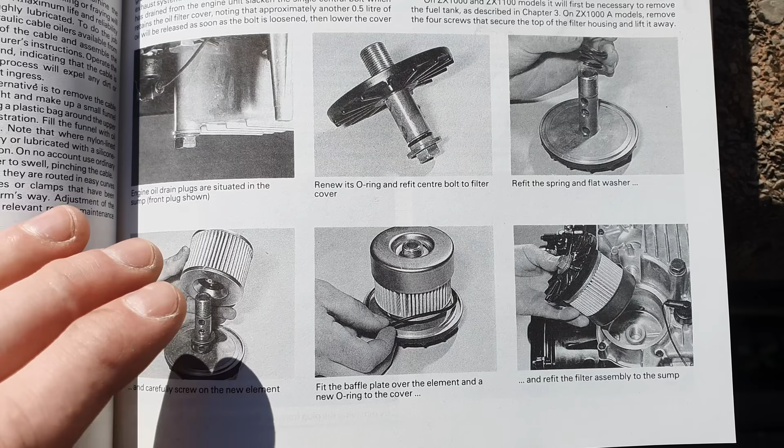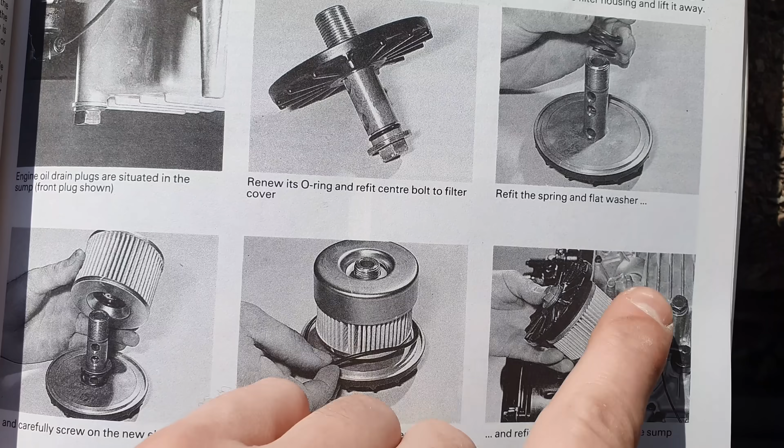So I got a comment this week saying that I'd done this wrong, and I thought I had, but no, I haven't. The spring goes on with the washer, and then the filter, and then the metal cap thing. The metal cap thing doesn't go on first, and then you put it in. Well, okay, in this picture, the engine is upside down, but it goes in like that. So I did it right. Okay, cool.

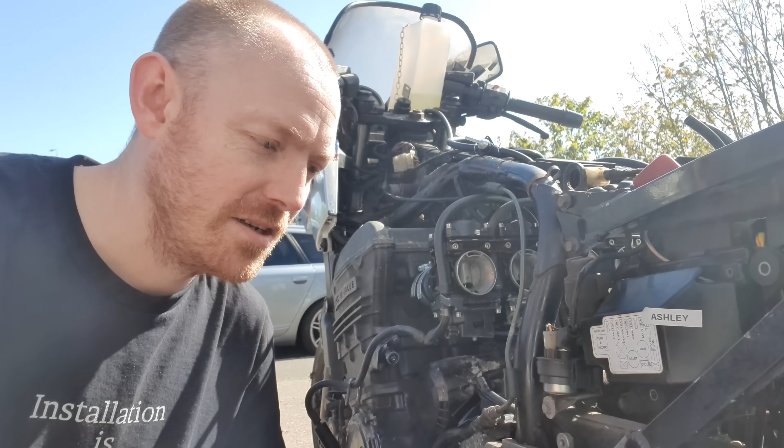Hi. Before I do anything else, I want to check the gearbox over, because we didn't do that in the last video. So I want to make sure that we've got gears and it's not completely fudged. So that's the plan. I'm just going to start the engine up and then try and whack it into gear, because I haven't got any clutch fluid in there and I haven't done anything with the clutch. But I can just bang it into gear and it should free it up, as long as the wheel is off the ground, right? Second thoughts, before we do anything, I need to sort this cam tensioner out.

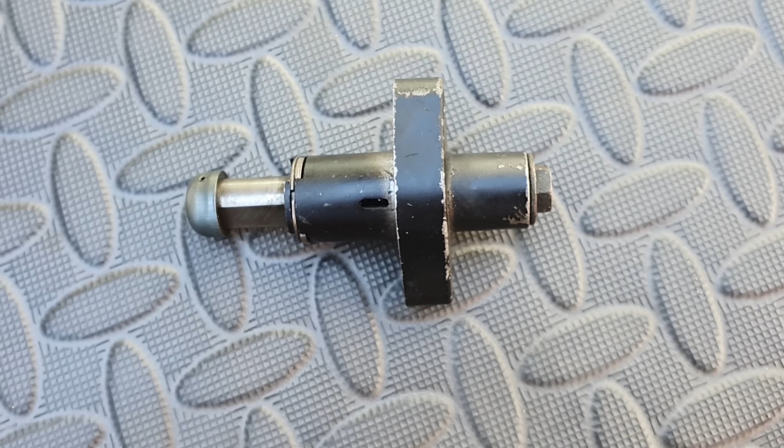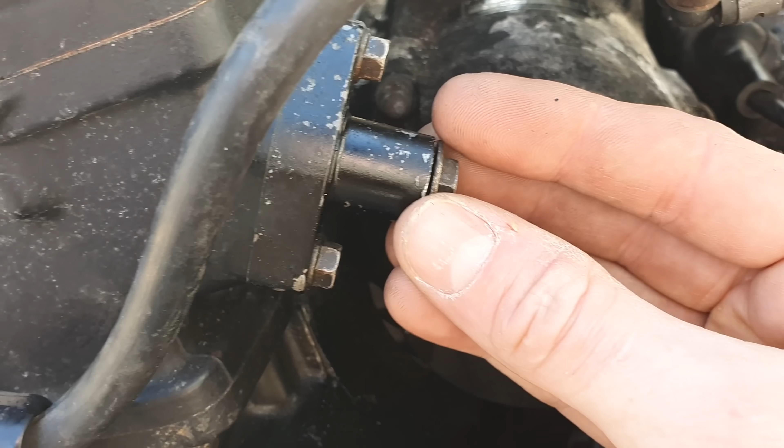Now, thank you everyone for your comments and telling me what it is. It actually tensions the cam chain inside the engine, so it's really super important. I've actually bought a replacement and I'm going to fit that now. This is the replacement, and this is the bit that's missing from mine, right? So I was just going to pop this on the one on the bike, but if you look at this, if I try and do that, it just turns infinitely. So I'd suggest someone has done that up way too tight and it's ripped the thread out of the inside of the tensioner. Brilliant, well done, whoever that was.

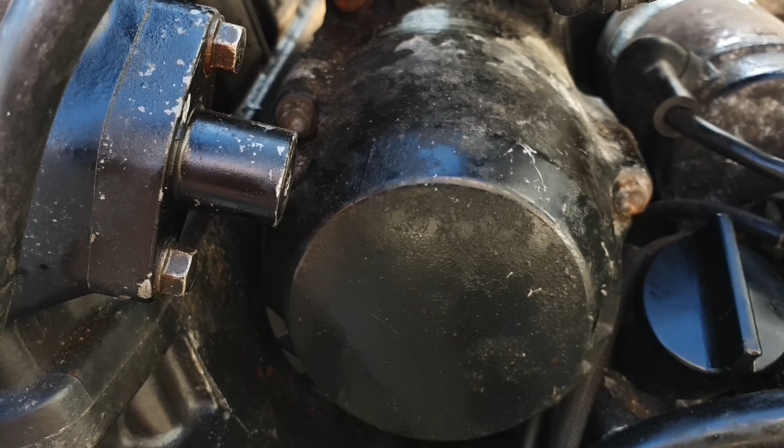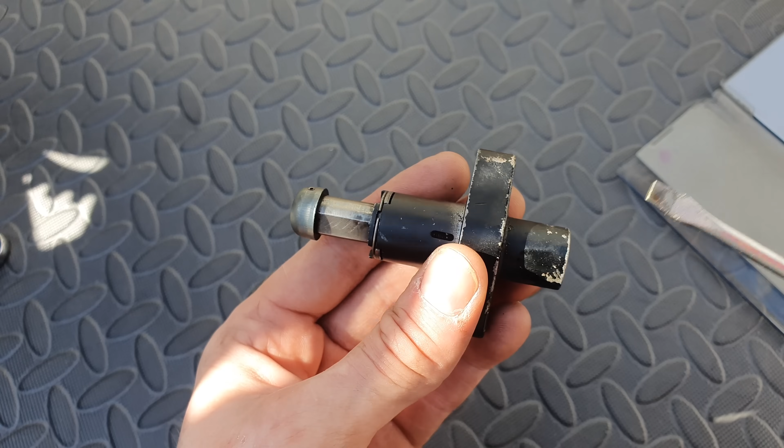So with that bolt removed, I'm just going to show you how this works. In the previous video, you saw me stick a screwdriver in here, right? Now if I turn the screwdriver, it actually pulls in the tensioner bit itself. And then I let the screwdriver go and it springs back out. So I'd imagine if I undo the two bolts that hold this in, when I fit the new one, I might have to wind that in, put it on the bike, and then release so it automatically springs out and pushes the cam chain to the right tension, assuming.

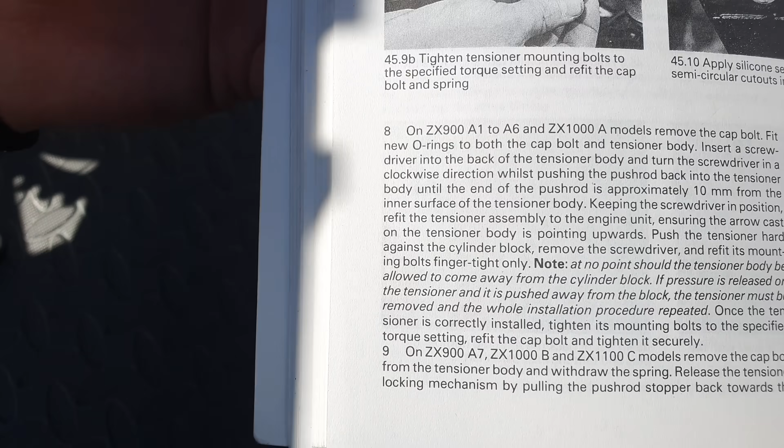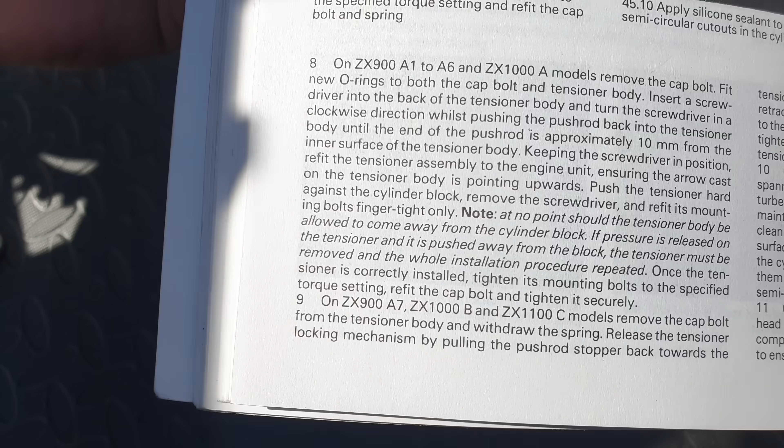Because assumptions are the mother of all mess ups, I've just found the instructions in the old trusty Haynes manual. I don't know if you can see that, the sunlight's a bit bright this morning. And it basically says exactly what I just said. Screw the screwdriver in until the tensioner retracts into the body, and then fit to the bike whilst holding the screwdriver in there. It sounds a bit awkward and fiddly, but that's the right way to do it, because then it will spring out to the right tension on the chain. Wicked. So let's undo these two bolts.

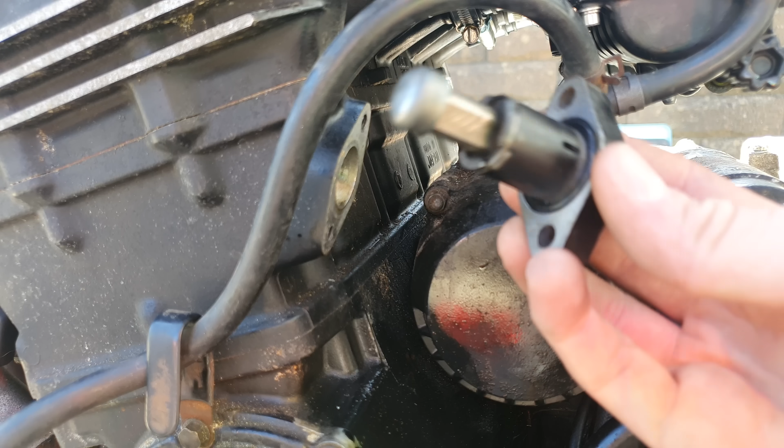I'm going to get a socket. I'm actually having to hold my left hand up at the top, because there's sun glare. The struggle is real. Oh, not 10mm apparently. 8mm? Right, try an 8mm. There we go. Uno. You didn't see that. Oh yeah. Oh, look at it, springing out. This is where I get absolutely covered in oil, right? Oh, that's a long bolt. It's a long bolt, I tell you, a long one. Well, that looks exactly the same as the one I've got to replace it with, so that's a good sign, right? Okie dokie. It was quite expensive. It's second hand, and it was 50 quid. Yeah, tell me about it.

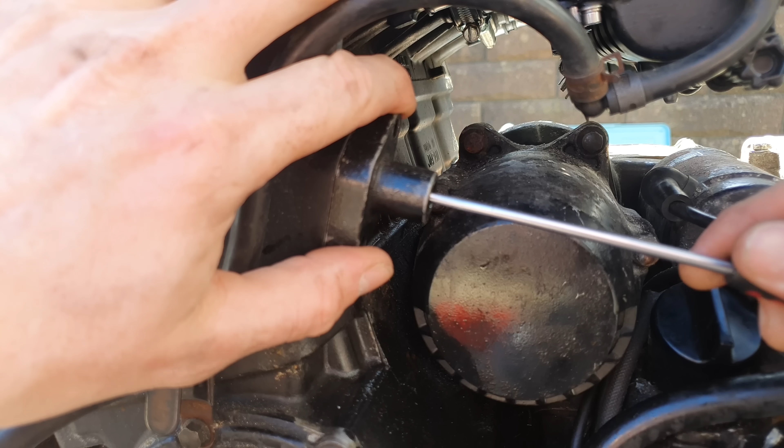Right, I've put my kneelie pad over the top of the bike, so you can see what I'm doing. So I've got to wind that in, like so. No, not like that. Like... Oh, this is frustrating. Just make sure that O-ring's clean. Right, I'm going to do it slightly differently. Wait a minute. Oh, very important. This has got an arrow on it, pointing upwards. That arrow's got to point upwards. Okay. Now wind that. There we go. Lovely. And then pop the screws back in. That was relatively painless, wasn't it?

Don't know if you can see. It's probably all blurry, isn't it? There we go, and then second screw can go in. Right, I'll just nip them up. Obviously it's a motorbike, not an industrial piece of crazy equipment, and there's an O-ring in there, so they just don't need to be tight. Just give them a little nip. You've got to bear in mind this is probably aluminium, and aluminium is, well, quite weak, and the O-ring will seal it without you needing to put too much force onto it. Well, that's not going to fit there, is it? There's the 10mm. There you go, and then we'll just nip that one up. Sorted. Now hopefully oil won't be running out everywhere.

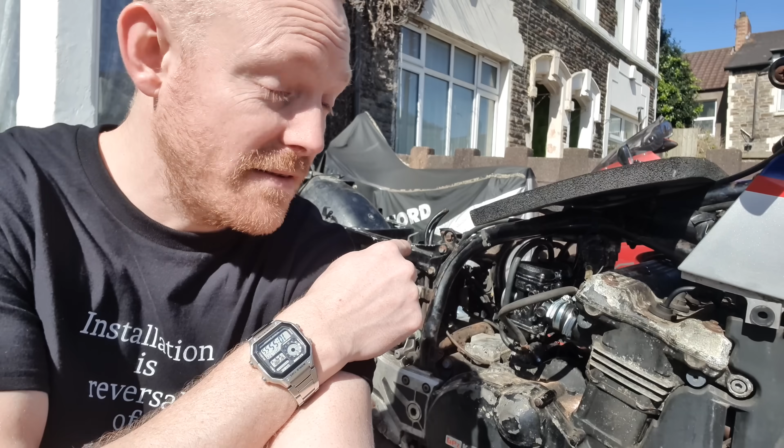Oh, this is what I stopped the sun glare with, by the way. So I actually made the last video on Saturday. It is now the following Saturday, and I've actually taken the carbs off and refitted them because I was just going to crack on and strip the bike down, but then chatting to a couple of people, we want to make sure that the gearbox is okay. So I've put the carbs back on. It's taken me ages because the throttle cable is the worst cable on any bike I've ever worked on to try and get in. It's an absolute nightmare. I'm sure there's a trick to it, but I don't know it. So I'm just going to try and fire it up, get it nice and warm, and then we'll try banging it into a couple of gears.

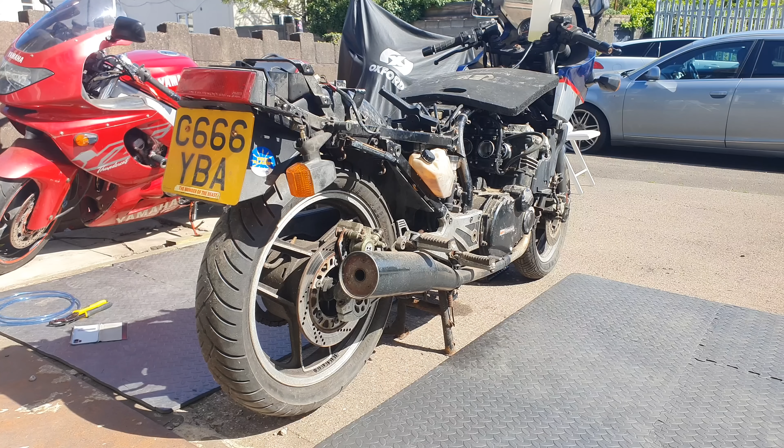God, this exhaust is warm. It's just been in the sunlight for an hour. First start in a week. We've got fuel, carbs back on, choke out. Right, let's go, see what happens.

Not bad at all. There's a pop of bolt back in here, it's annoying me. Alright, calm down, mate, calm down. So this is why we label stuff. Look, water tank, I think.

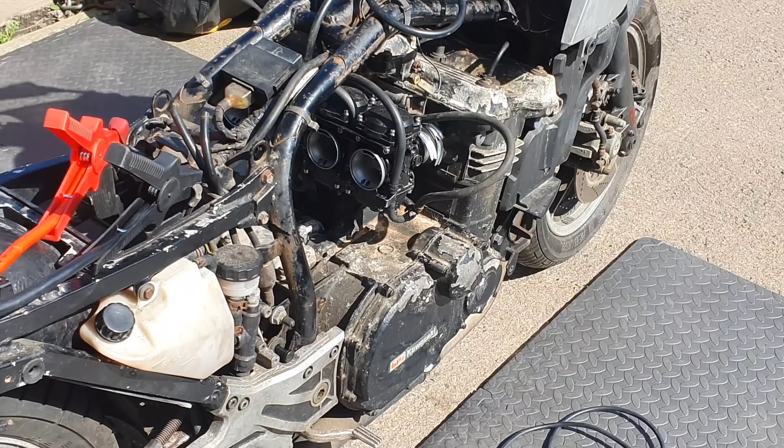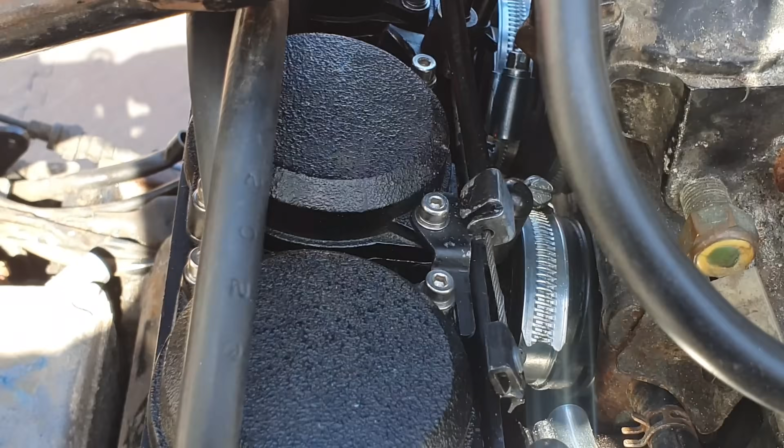So I've got a bit of throttle hang, so what I'm going to do is balance these carbs properly. I've got a carb balancing kit, so what you do, you connect a gauge to each one of the vacuum ports on the top of the carbs, and then you can adjust the adjuster screws. So you pair up these two and then the other two, and then you pair up the two pairs together using the center one.

So I've set the gauges up, but I've got a little visitor who's come out to get some sunshine. Hi! Makes you sound like a little puppy. I can see you. Give me a stroke. My hands are a bit dirty. Oh, don't touch me.

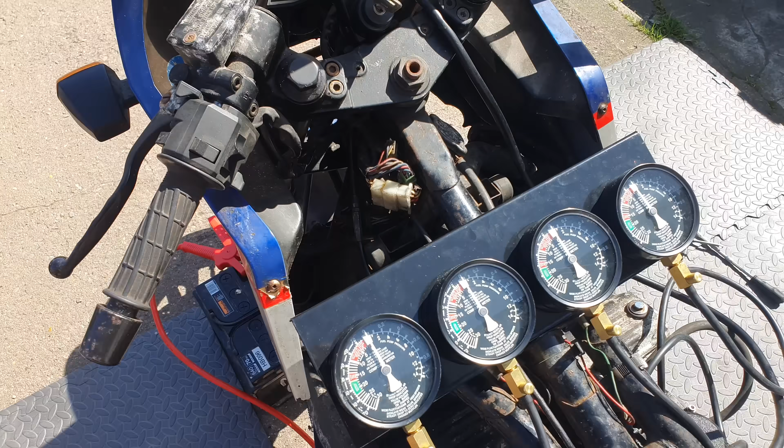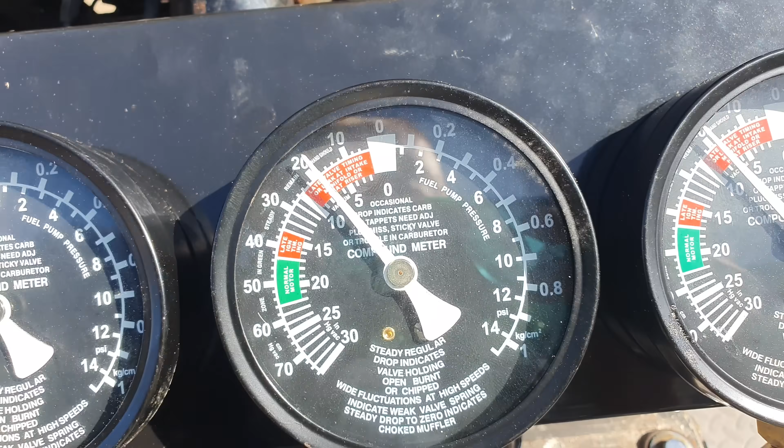Right, let's have a look. I haven't touched these, I've just put them on the bike and now I'm going to start it. Okay, so bear in mind I did this by eye. They're not too bad. Well, they're in a red zone which says late valve timing, leaky intake manifold, or riser. Okay, well, the task of this is to get them all the same.

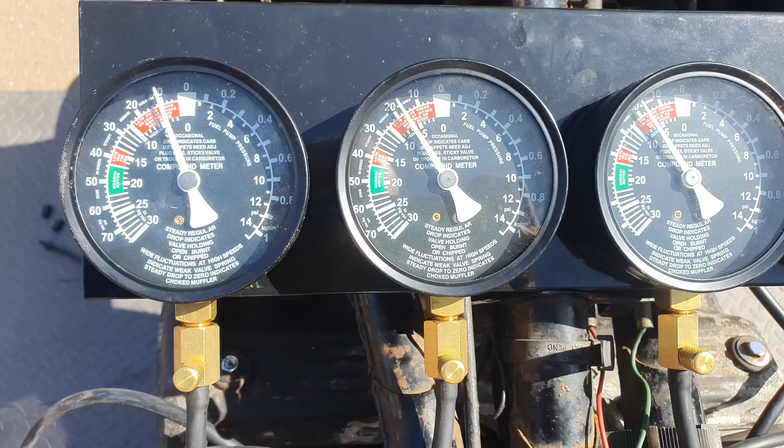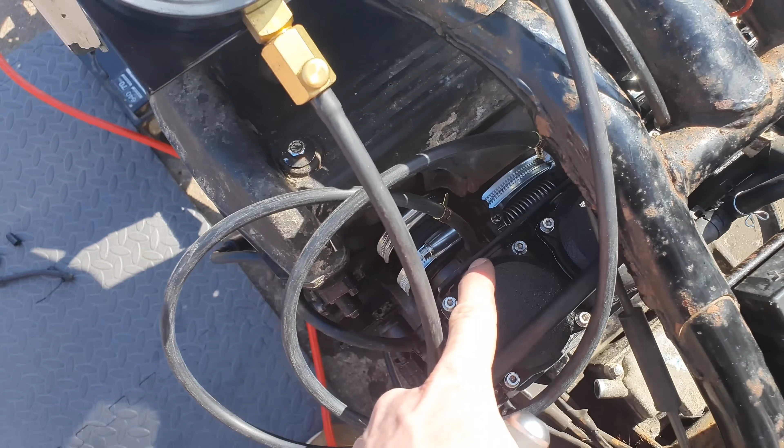So these two are actually pretty good, and that one's pretty well matched to those two, but this one's a little bit higher, so need to tweak these two together and then match those two to those two. You'll see what I mean in a sec. Right, pulled out the JIS PH2 for this purpose. So here's the screw I'm going to adjust, and that will adjust the positioning of the two butterflies in these two carburettors. Right, here we go.

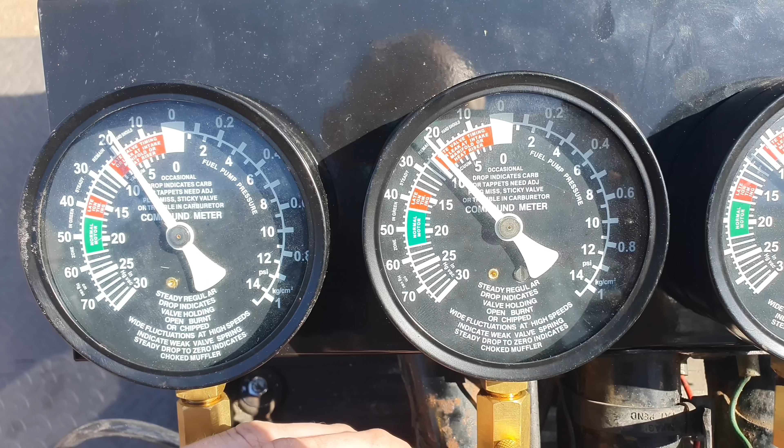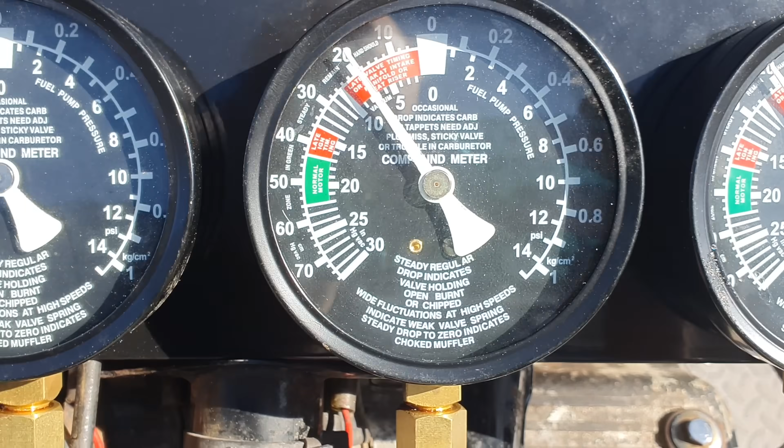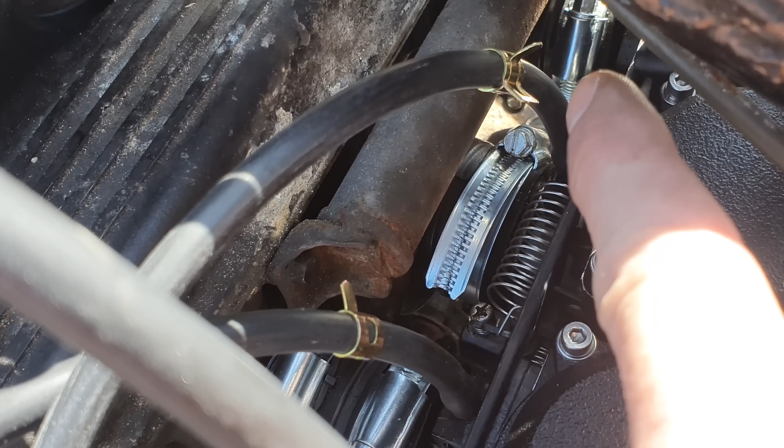So pop the screwdriver in there and watch these two gauges. I think I'm going the wrong way. There we go. So those two are pretty much exactly the same now. Right, so now the two right-hand cylinders are slightly lower than the two left-hand cylinders. So now I need to try and get something in there to adjust that middle one, which is a bit of an awkward one to get to. So I'll do that and then come back to it.

So let me explain what I just did off of camera, unfortunately. So I had no control over the idle control. There's a little knob down here that opens the 4 butterflies. They're all matched up nicely on the vacuum dials now, but I wound that out all the way and it was still probably about 2000 RPM. So I've actually pulled the throttle cable out of the holder because I wasn't convinced the butterflies were shutting properly.

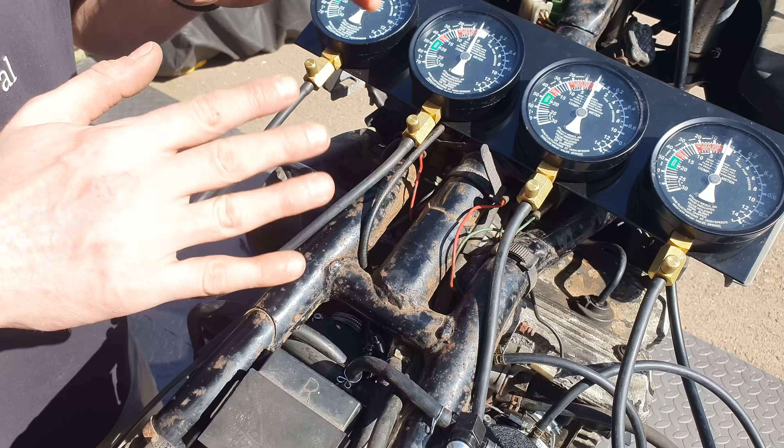Now listen to the idle and the rev. There's no rev hang whatsoever. Ready? Look how low that's happy to rev. And, oh, that's not going to work because I've taken the cable out. You ready? Look how quickly it goes back down to idle. I'm not going to get it running better than that.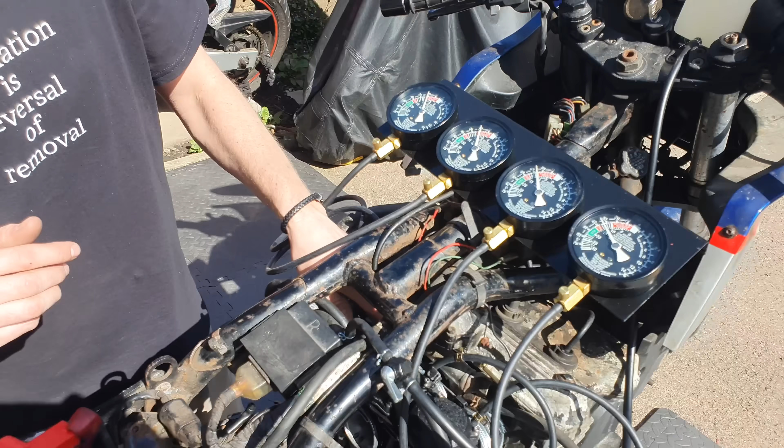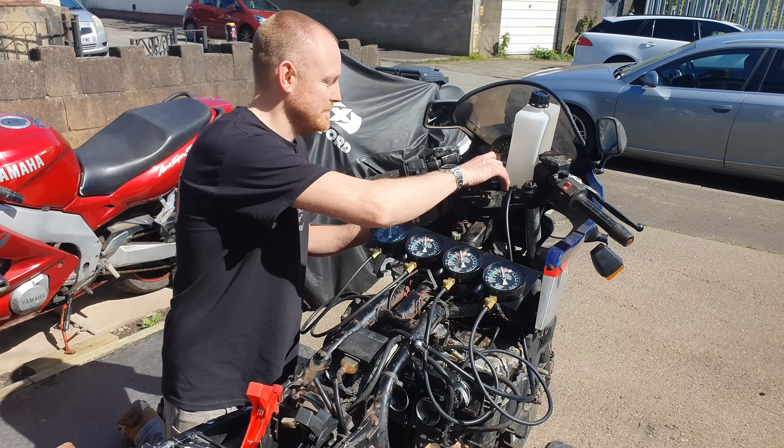And if you look at these dials, they're all reading the same. Now they're probably in the red. I'd probably wind the idle up a little bit. There we go. They're in the red, probably because I haven't got the airbox on, so it's probably not very happy about that. But anyway, I'm happy about it. Yeah, that's amazing. Woohoo!

Okay, oh yeah, the whole purpose of doing this, let's see if it will go into gear. Okay, this is probably not going to... Oh, I need it to rev a little bit higher because it's just going to stall if I try and bang it into gear. Right, let's see what happens. This is where it falls off the stand, right? I just use the throttle. It's in gear. Look at it.

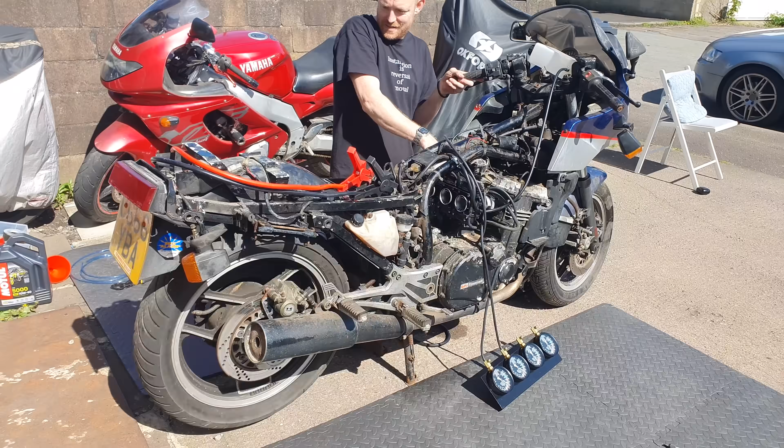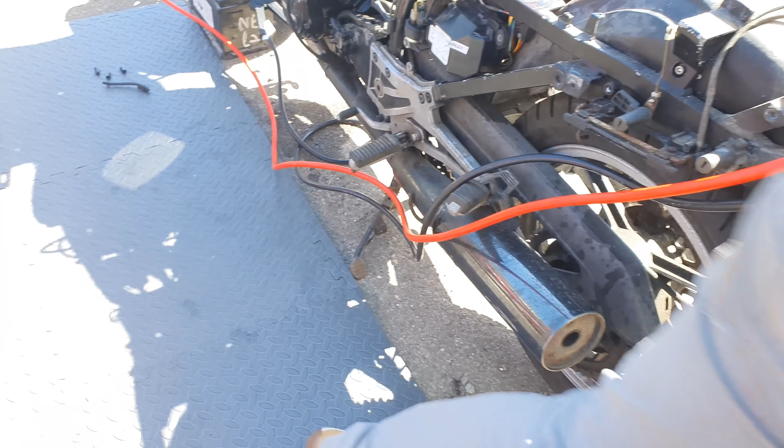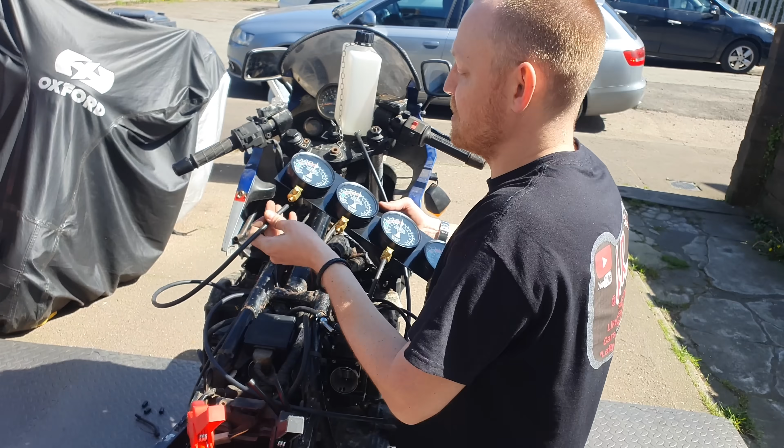We got a fuel problem now because everything fell off the back. Right, let me get my vacuum gauges. Oh, they're right. So now we got a vacuum leak. Brilliant. What a muppet. Right. I'm going to put these back on and make sure that we're all good on the vacuum, and then I'm going to take them off and plug the holes again. So we can do that off camera.

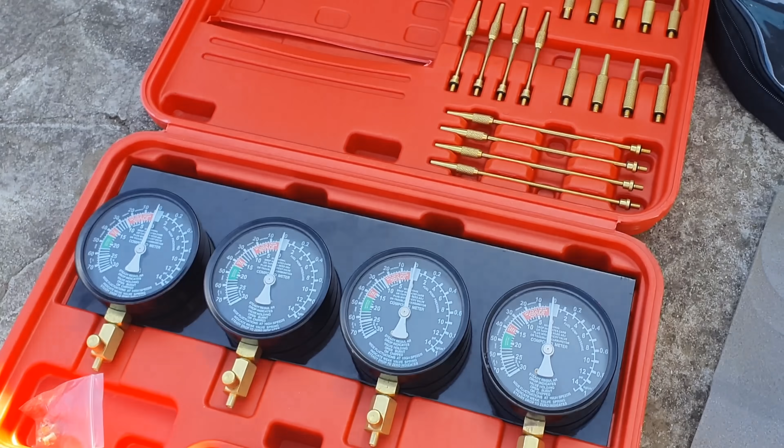Right, let's run through the gearbox. Let's see what we've got. Might run out of fuel. Let's see what happens. Well, that's a result. So, gearbox good. I don't know why I'm surprised. Oh, that's hot.

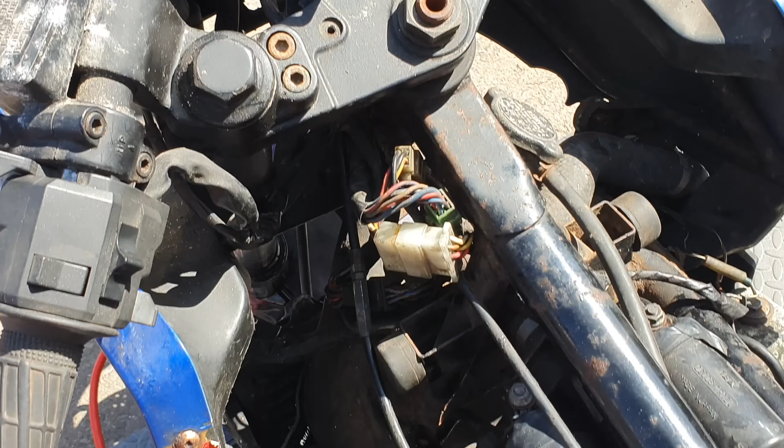Oh, and I did get a couple of comments about my weird OCD with red being on the left, but I was wrong. Positive is red, and that is on the right, so I'm going to swap them over as well. Duh.